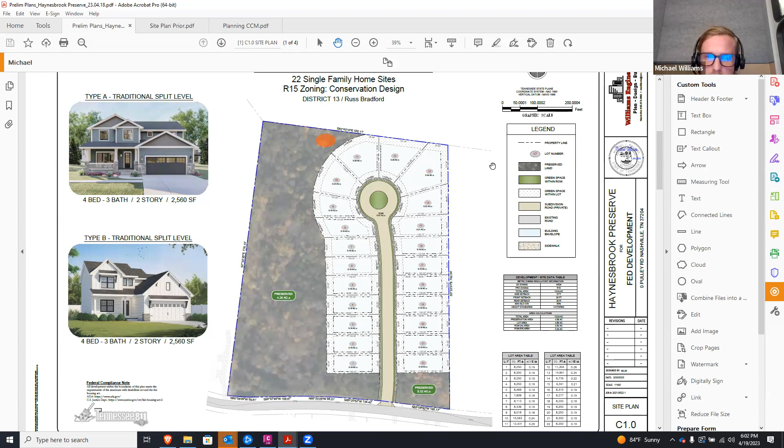All right, well thank you everyone for letting me present in front of y'all again. Like Councilmember Bradford said, we had a presentation of a development about 18 months ago, I believe, and I was just going to touch on it real quick to start with. Just FYI, Jeff Parnell, he's an engineer with TTL, he's also here and will be available for questions as well.

So this is the original site plan we had. The acre, or the land, is 10 acres, and we were showing this orange portion having 30 units being townhomes and short-term rental, and then the remaining area being R8 for 47 lots, for 77 total units. We did receive some pushback on that.

Understandably so, I guess we understand. There were a couple other items of concern. I believe this home at the southwestern portion of the site was concerned about stormwater, and I think other than that, the main thing was density.

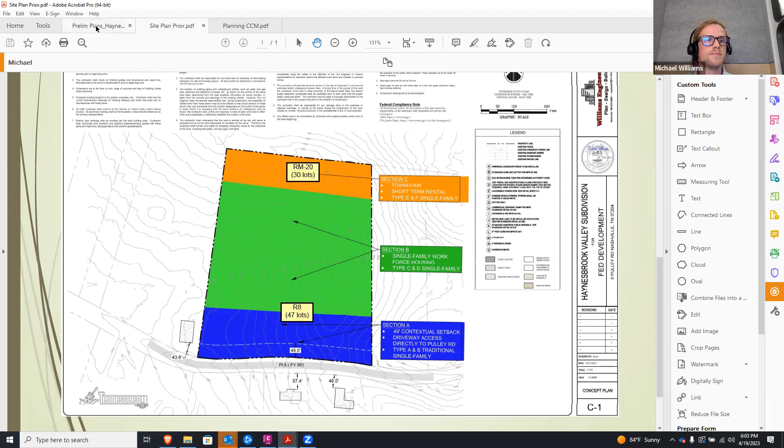So I'm going to flip to the new presentation and what we're now proposing. The new proposal is for 22 lots. The lot area in total is 4.58 acres.

This is a cluster lot subdivision, and it allows us to basically preserve a section of the site for any natural features that might be on it. In this case, there were some community members last time concerned about the forest and the trees being cut down. We totally understand why — if you've lived in this area for a long time and you look over and the entire site is full of trees, you'd want that to remain there.

So that's why we went with this cluster lot subdivision, to preserve a section of this site. You can see when you enter into the drive that there's also a section of the site that is preserved, so that the residents in the nearby area will be shielded by a natural barrier, which is the existing forest. We were hoping that would look better to y'all.

And I'm going to flip to the AutoCAD real quick just so I can show this. This white line is the ridge of the site, and this section is the portion of the site that originally was outfalling to the southwestern portion of the adjacent property, and it's going to be — we're going to show this flowing to the north instead.

So not only will we always have to detain, not only will the pre versus post flows be the same, but the volume will be less — there will actually be less volume of stormwater going to the west. So we wanted to mention that for a minute.

Mr. Williams, I want to ask just one quick question. Why would you not bring it to Pulley Road? The water, the stormwater? Right.

Well, a portion of the water will flow down Pulley Road, especially this existing stuff. Anything to the west of this white line will continue to flow to the west, but it will be detained. The section of the site that is developed will be detained first, and then it will outfall somewhere around here, then outfall through the forest as it did previously.

So we're providing this large buffer here, it's 250 feet, leaving the existing forests untouched. And then in the frontage, we're doing the same thing, about 96 feet to the road.

And a portion of the stormwater will continue to go to the west, like you said, and you can kind of see the contours. This is where the existing contours are showing the water going, but we're removing where my highlighted white line is. We're removing that section where it used to continue to the west, where I believe someone mentioned last time that they had stormwater issues, and that section is approximately 2 acres, 92,000 square feet.

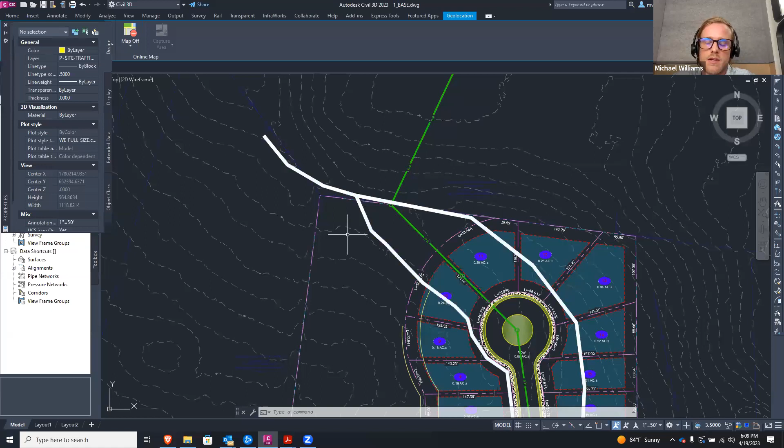This is a ridge, so there will be inlets along this drive, and all the water will flow along the ridge. And then this is a ridge as well, so everything over here is falling back south, right? And everything to the north is falling back into this area, right? Yeah, and we're going to put it right at the end of this.

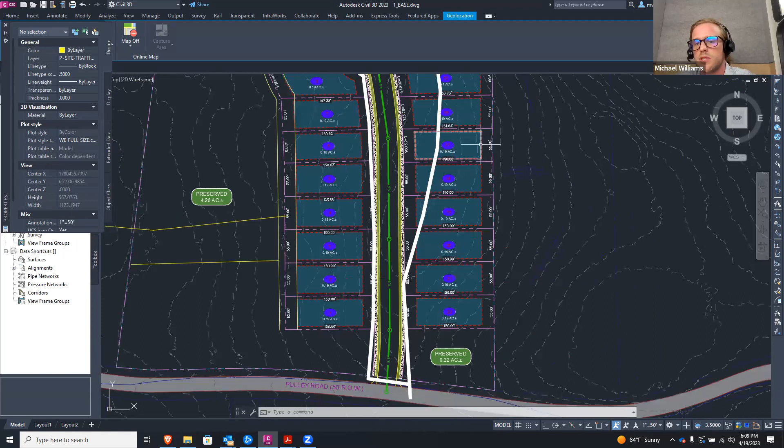This is where the detention is going to go. That's going to receive all of the impervious area for these homes, so some of these homes could potentially outfall this direction.

And so the people that manage the property that water is going to go onto, they're cool with that? They know about it? This is the airport authority. This is Metro Airport Authority.

At the end of the day, when I submit for a grading permit to Metro Stormwater, I show where the concentrated flow leaves the site in existing conditions, and then I show that in proposed conditions. And I can't show more water leaving the site for the 2-year, 5-year, 10-year, 25, 50, and 100-year storm events.

I calculate how much water would release from the site where the water leaves the subject property to an adjacent property. So they're going to be the ones that hold that accountable.

Not every site has a stormwater system with pipes, and sometimes it flows into people's backyards. But at the end of the day, the requirement is to not release more water after the development to the adjacent development. What we're saying is we're actually releasing less volume of water too.

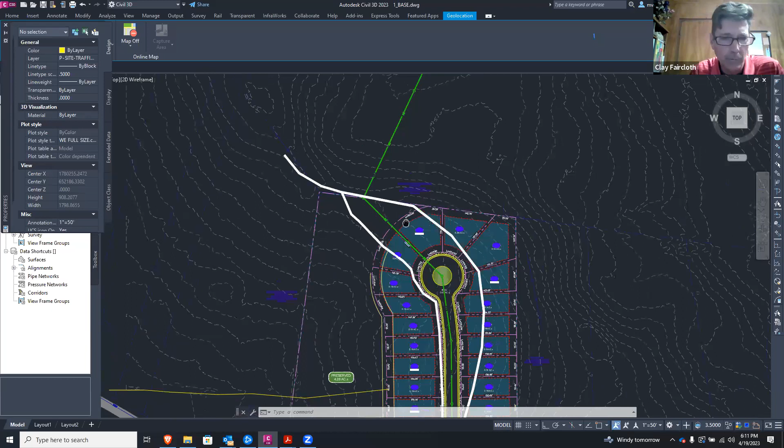Yeah, so that's the plan. And so these lots on the left side, those lots aren't going to go to the north because they're too low. But we will still have detention for these as well.

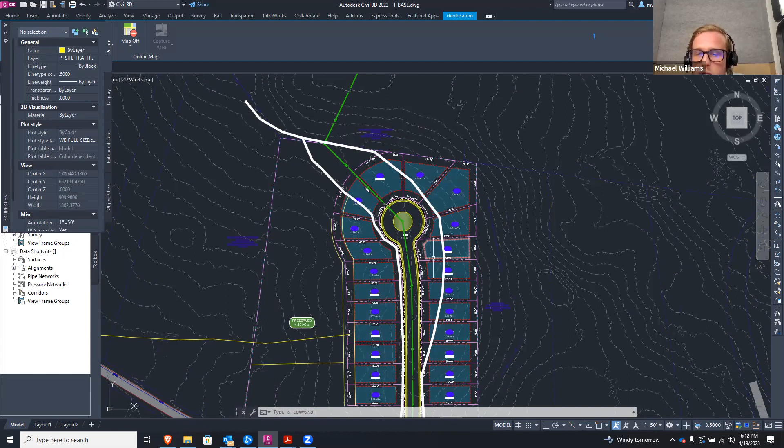What I was trying to hit on was that our post versus pre cubic feet per second is going to be less, but the volume's actually going to be less too. So what's going to end up happening is your post versus pre is going to be significantly less going that direction.

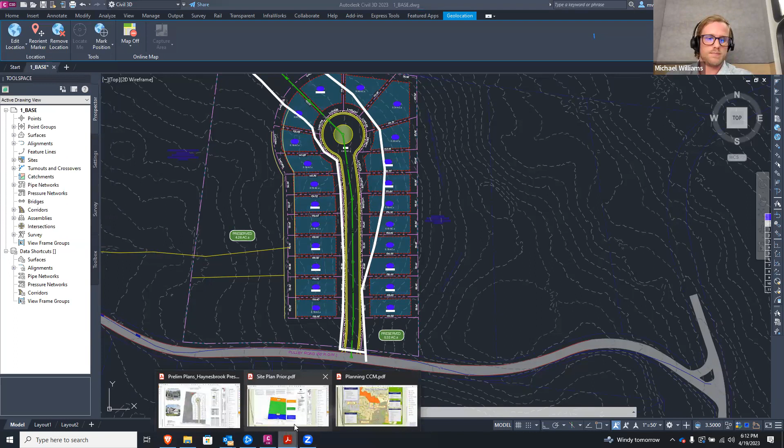But yeah, sorry, go ahead. We're good.

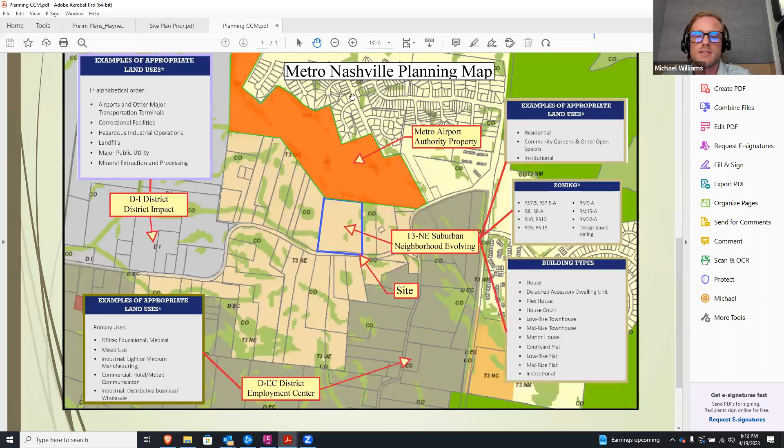So on the previous design, we had some townhomes, and we did that because this is in a neighborhood evolving area, and it technically says we could potentially present to Metro Planning an RM20 or an RM15. At the time, I think that was STR eligible, and we were trying to show that in the back of the site to meet density.

But on the new proposal, we're just doing single family homes. Here's 2 visuals for you to look at.

We think this would be a great subdivision. Something I just noticed, I wasn't planning on talking about this, but there is a Harding Place extension coming through here, and I don't know how that's going to affect y'all in the long run. The only thing it could do is potentially increase density in that area, and planning might start recommending even more density because of this main thoroughfare. This is probably 10 years down the road.

So, FYI, Mr. Williams, I want to give an update on that. The Harding Place extension is never going to happen. Basically, the redoing of Donelson Pike is taking place. So the Harding Place extension through there, if it does happen, it's probably going to be 30, 40, maybe 50 years down the road. TDOT has no plans for the immediate or long distance future to do that. They're focusing on Donelson Pike.

Well, the only reason I said it is because I did look into that about 18 months ago, and this wasn't showing on the parcel viewer, and I just happened to see it today. But yeah, I totally agree, it's definitely a long ways away if it ever happens. Michael, I appreciate you bringing that up. It's probably closer than we think. We'll see. I don't know.

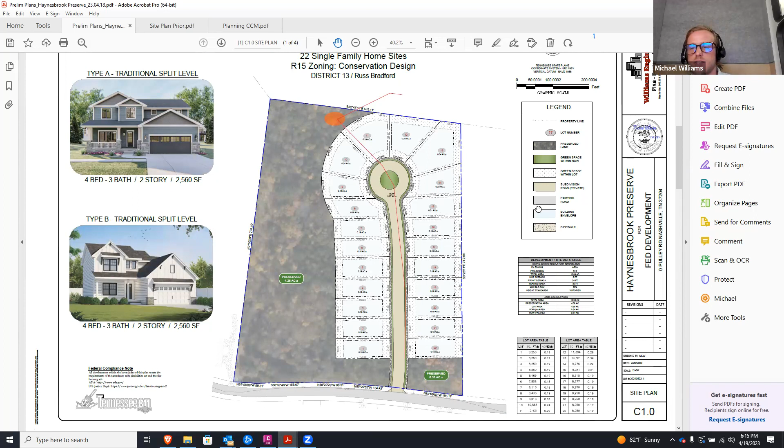Anyway, so here's our site plan, and the next page is the architecture. This is approximately what we would be looking at. This is a suburban development, we're not doing townhomes. There's not a lot of land left in Nashville to build stuff like this, and I think people would be really happy to have homes like this in this area. I guess we heard at the last community meeting how much y'all care about the area.

Do you have any idea what these houses would go for once constructed? I don't know, I'm just an engineer. I try to stay out of that.

Now, at the last meeting, there were some concerns from the residents as far as this development having access to city sewer. And in your email, you had mentioned some changes or updates to that. You want to go ahead and speak on that, on the sewer? Sure.

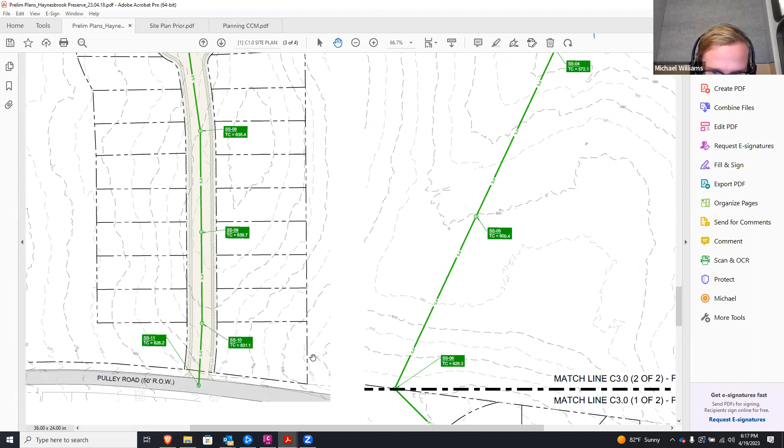So this was kind of the original idea in the past too, but I hadn't really drawn it up yet. Let me flip the parcel view so we can get a better image. This is where the gravity sewer is, and this is the only route that gravity sewer will ever reach Pulley Road, unless something crazy happens to the south. This is where we're connecting. We did talk with Metro Airport Authority, and they are willing to give us an easement to cross this terrain. It's a pretty long distance, I don't have exact distances here, but it's pretty long.

We are able to connect to an existing sanitary sewer gravity main, and we want to bring this all the way to Pulley Road. Now, there will be some deep manholes, particularly in the middle of the site, but this is possible. That's the plan for gravity sewer.

Now, this line could potentially end up slightly near where this Pulley Road name is, and where we have it right now, any residents along Pulley Road would still have to have a grinder pump to reach that sanitary sewer main. But this opens the door for anyone in that surrounding area that may want gravity sewer in the future. You do have to have the grinder pump, but before there wasn't even a grinder pump option, it was you have to do septic. So we think bringing gravity sewer to Pulley Road would be beneficial for the community.

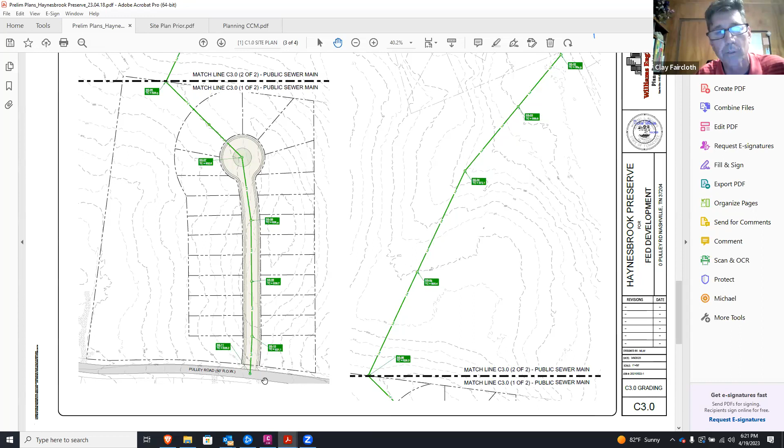They can. I may have misspoke. I was saying...

You were saying that the only way we could get sewer to Pulley Road would be through your development, Mr. Williams, and that's not necessarily the case. Well, it's the only logical way to bring gravity sewer to Pulley Road.

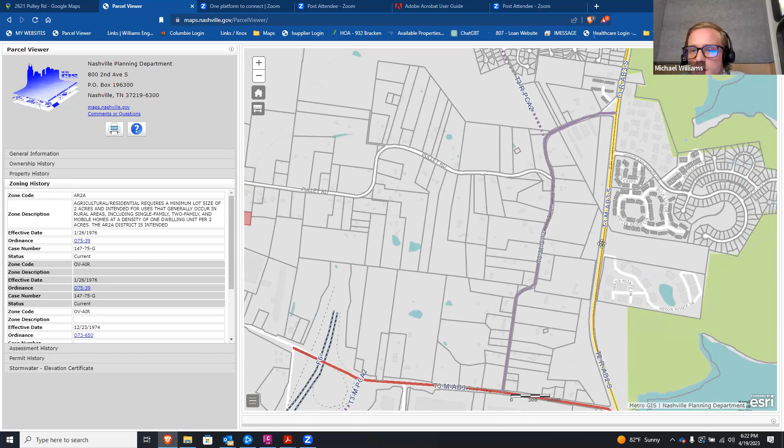There's another main down here off Couchville Pike. You'd have to run it... I can't remember that road, but let's see, Pleasant Hill. You'd have to run it all the way through Pleasant Hill, and then there are creeks or acute angles in this area, and then there's actually a section coming from that direction that you could not continue to gravity flow, so you would have to have a lift station.

Other than that, this is your next option. Michael, if they put a sewer, they wouldn't run it along the streets. They would probably put it behind those developments and run a straight line from one area to the other.

Well, you'd have to get an easement through all the private properties. So for you saying this is quote unquote the only way, is it from an engineering standpoint is closer, is just one easement through MNAA? Is that correct? Okay, just for my understanding.

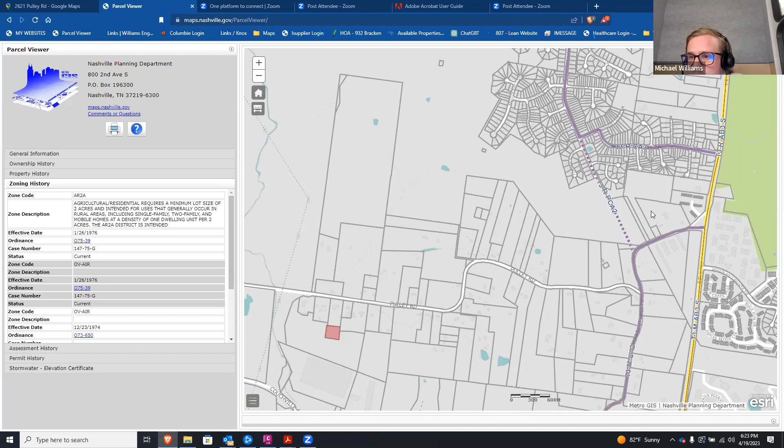And anyone can access it. It's a public sanitary sewer main that we would be extending. So anyone can access it.

So what you're saying, I understand that you'd be connecting your property with the sewer main that basically ends right there in Timber Valley. And it's a main that anybody can access, but right now, your development is the only one that has the easement to go through airport property, correct?

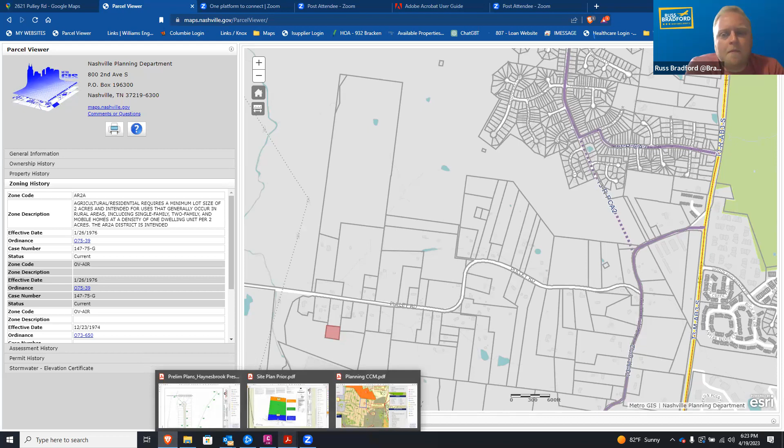So if we have anybody else who wanted to connect to it, they'd have to go through airport property. Yes. And my thing is this: if airport authority allows one easement, then they should have to allow multiple easements.

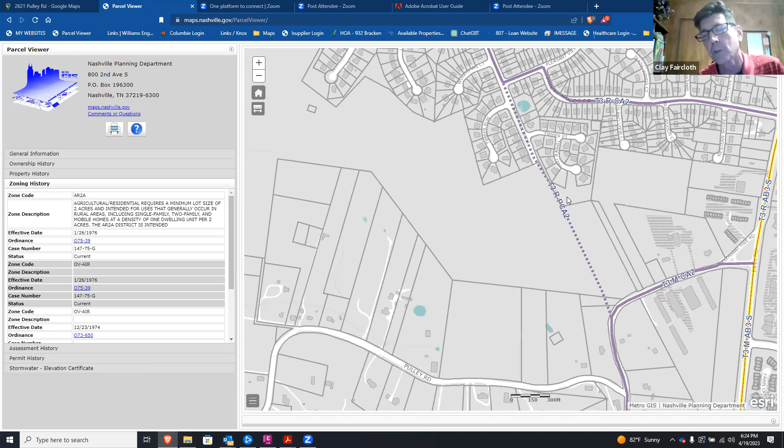Michael, when you say yes, have you talked to which department of the airport authority? Real estate, I assume? So this was about 18 months ago. I'd have to go see if I can get you a name. The guy is not there anymore because I reached out again. This was 18 months ago.

Okay, if I can see airport authority... this was literally 18 months ago. Yeah, we are undergoing a lot of staff change, especially in the real estate department.

So I just want to make sure that not only does real estate need to be in agreement with this, our legal team, finance, and especially planning and engineering, since you mentioned other than sewer, there will also be drainage into the area. We also need to check that.

Internally. Sure. Yeah, absolutely. Yeah. And we will take care of that.

The airport authority was wanting the developer to pay for it. And we were in negotiations, or the developer was in negotiations, on how much they would pay for it before our last community meeting, where we didn't end up moving forward with a rezoning. So at that point, we stopped talking to the airport authority representative. Okay.

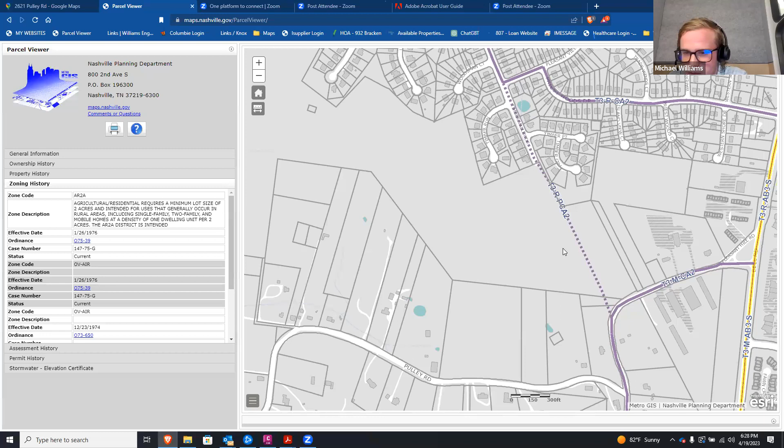Sure. Just FYI, the airport authority representative was John Corbett that we were talking to. Okay, yeah, he's no longer there, but I know what you're talking about. Like I said in the chat, if you ever find that email chain again, please send it to my email address, and I'll recirculate it and make sure everyone's on the same page. Definitely, thank you.

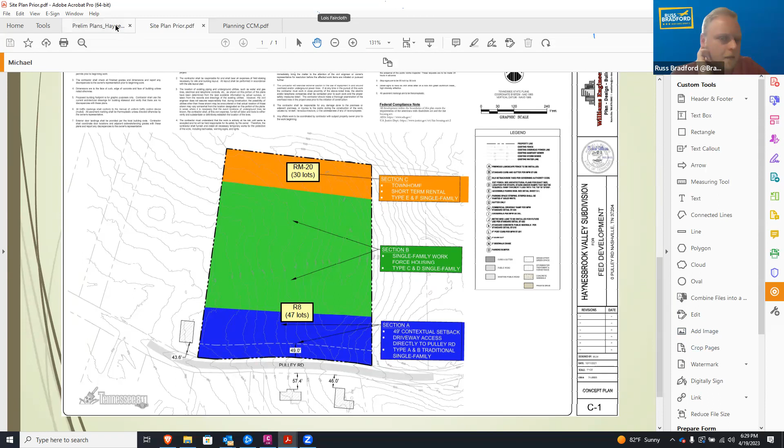I think it's the preliminary plans, I'm looking for the one with... yes. So I like that you're keeping a lot of the natural vegetation as a buffer. A question I have, because it comes back to the first meeting when the conversation was about traffic and traffic flow: is there going to be any kind of turn off so that people aren't having to sit and wait in traffic, so they can just turn off the road and into the entrance? Or will it just be a sharp turn in and out?

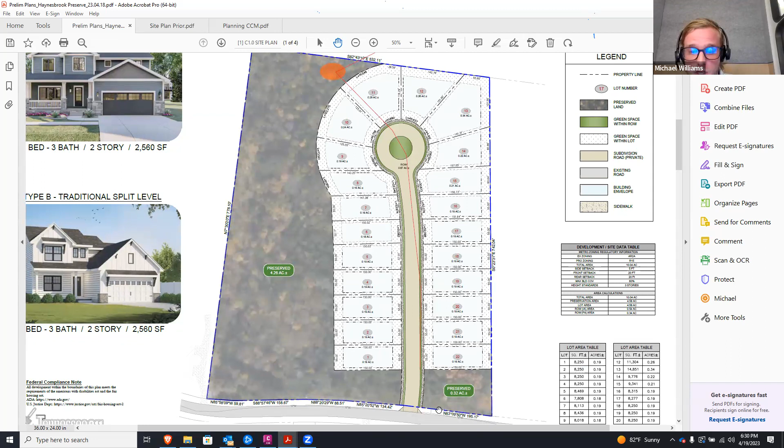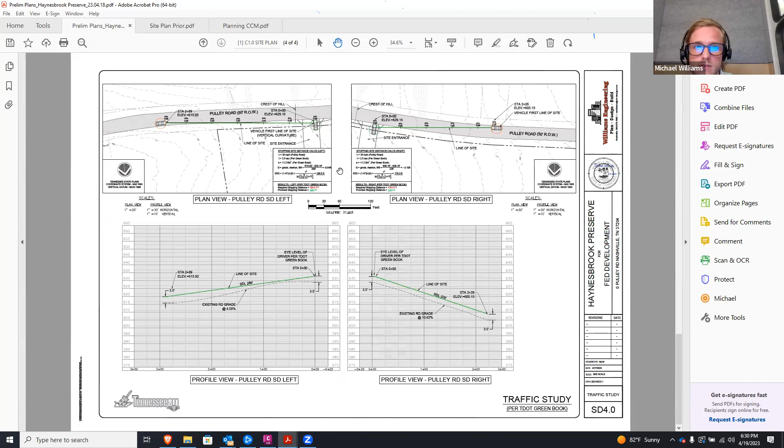I don't know is the best answer, I'll tell you if I don't know. There could be a right turn lane built into this drive, but that would ultimately be up to NDOT. I did do a traffic study for site horizontal and vertical sight distances to ensure our location would be okay and acceptable for a vehicle to be able to stop at the point of seeing the vehicle.

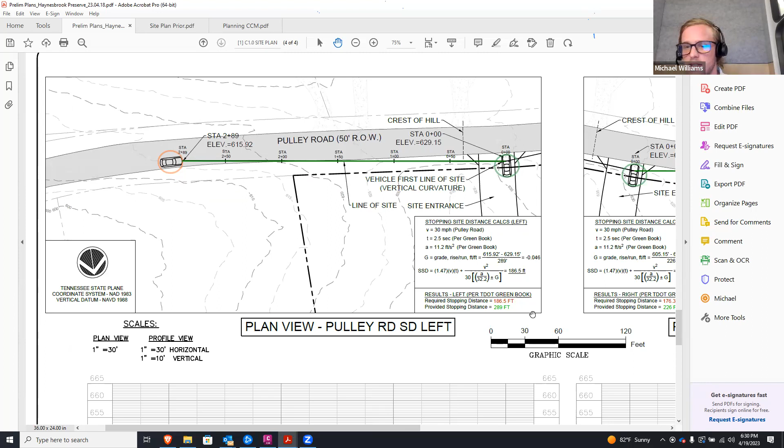This is per a TDOT Green Book, the book that everyone uses in Tennessee, so this is done per TDOT standards. NDOT might ask for some type of vegetation maintenance agreement, probably to ensure these lines of sight are kept. But yeah, that's all the information I have on that.

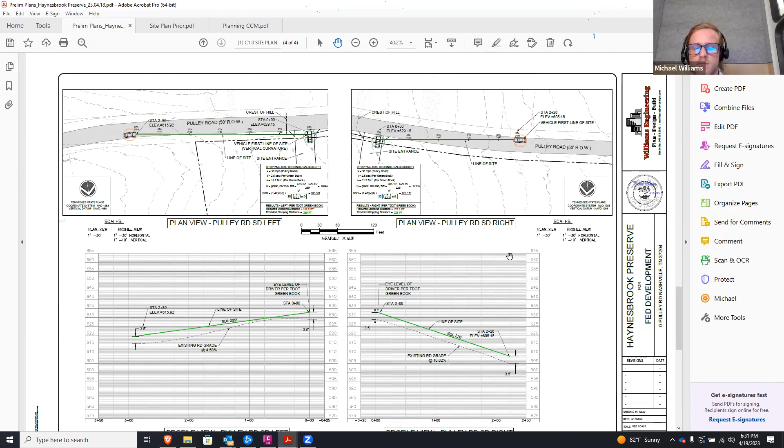Okay. Any other questions or thoughts from those on the call?

Just a quick question, this is Chaz Vetter, 2601. Just a bigger picture overview of what the process is like looking at rezoning, what the current zoning is, timelines, how many more meetings like this are there before this could actually be rezoned?

So I'll take a stab at that. We are approaching the end of this council term, and the planning commission wants to make sure all plans have enough time to go through before the end of the term. I believe the deadline for any new projects to be filed is the end of this week.

Some of the developers that have reached out to me in the last couple of months, I've pretty much said I'm not doing any new ones. But because this project, we first had a meeting over a year and a half ago, Mr. Williams reached out to me for the holidays. So I wanted to go ahead and have this meeting for the end of this deadline, so the community can hear what the changes are and what the plans are.

If we decide to go forward, I will let Mr. Williams know to go ahead and file with the planning department. Once that happens, they'll have to go before the planning commission. I'm not 100% sure of their schedule, but if it gets filed by this week, I don't think it would come before planning commission until probably July, maybe June at the earliest.